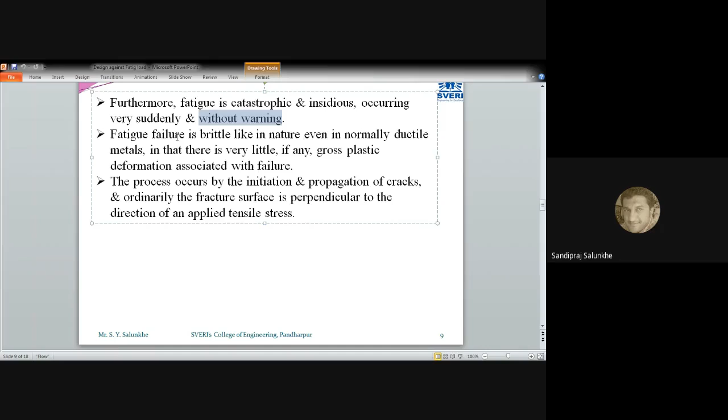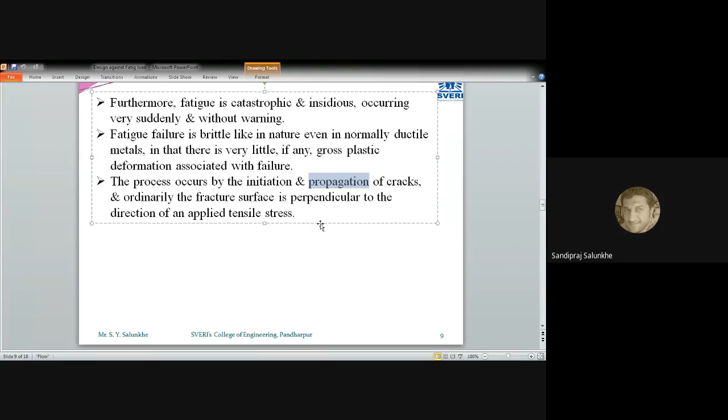So this is what about fatigue failure. And regarding the fatigue failure mechanism, in this last point, first the initiation of crack starts. Then afterwards, this crack propagates inside the material or component, and propagation starts. And when the propagation of crack is occurring, then ultimately the failure will occur for that component. We are going to see various examples of such failures. But the mechanism is: first crack initiation, crack generation in the component, then it propagates, and afterwards failure. So in 3 stages, this type of failure occurs.

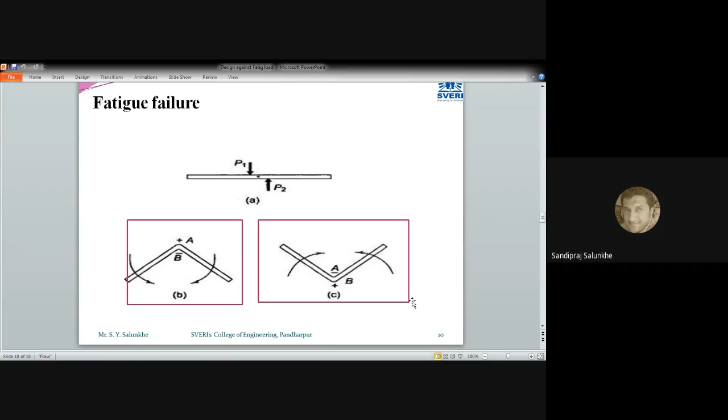Here is one more example. Fatigue failure is characterized by three stages: first, crack initiation, where a crack gets initiated because of the application of external force and the induced stress in that component. Then the crack propagates, and later on, finally failure occurs.

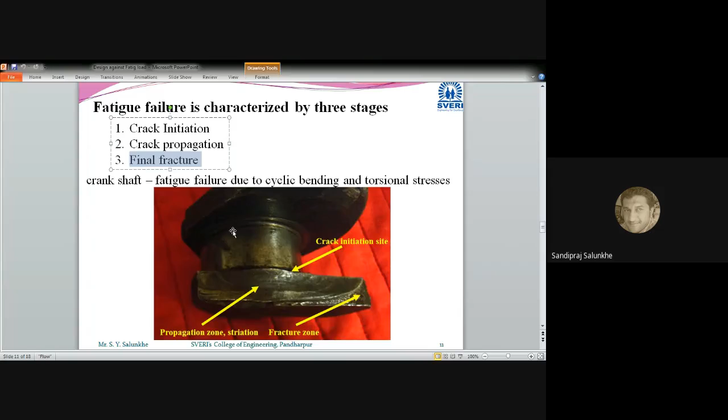Here you can see this picture of a crankshaft where the failure has occurred. The crankshaft is the main part used in a reciprocating type of engine. This crankshaft is connected to the bearing, and with the bearing we connect it to the connecting rod, which is connected to the piston. Now let me ask one question: whether the crankshaft undergoes repetitive type of stresses or gradual stress.

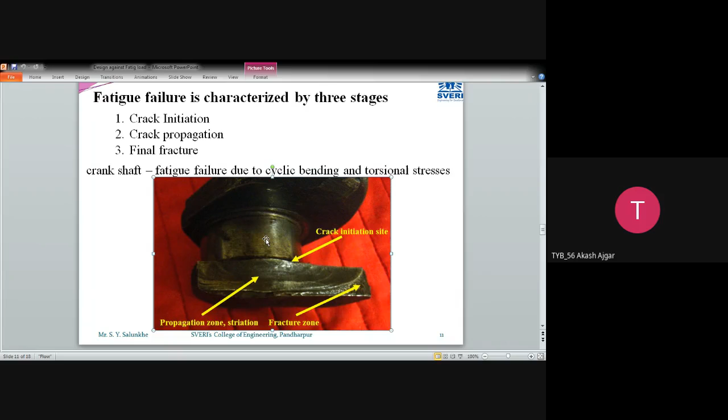I see, which component? Can you concentrate on a particular component? Piston. Piston. Okay, okay. So in case of piston also, repetitive type of stresses will get induced. You can mute yourself now.

Thank you. Yes, sir. Okay, very basic example I will take.

Consider the spade or shovel we use while digging for water, holding the gate of water - which type of stresses will be induced in that? Repetitive, okay, for a particular time period. Likewise, where cyclic stresses are induced, that means the stress will increase or decrease, become zero or become negative - that is compressive and tensile - that type of stress you are going to call fluctuating type of stress.

Okay, so many examples we have taken, and Akash has helped us have some examples of this repetitive type of stresses. So in case of connecting rod and crankshaft, this repetitive type of stress will get induced because basically the piston is going to compress the charge, then the charge is going to compress the piston. While we compress the piston or compress that charge with the piston, compressive stresses get induced.

And when we discharge it, okay, in that case also the fluctuating - that is the stress is going to increase and decrease. Maybe it becomes negative, or it remains on one side only as compressive, but the intensity of stress is going to change. Likewise, in case of this connecting rod, the stresses will get transferred to the crankshaft.

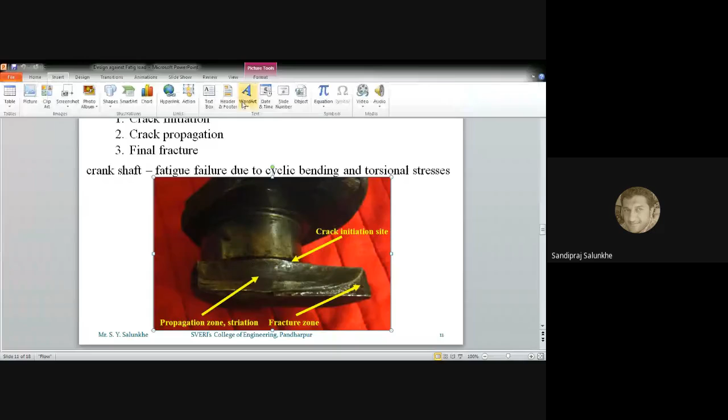point, and later on this crack gets propagated. Now this region, I'll say this is the region

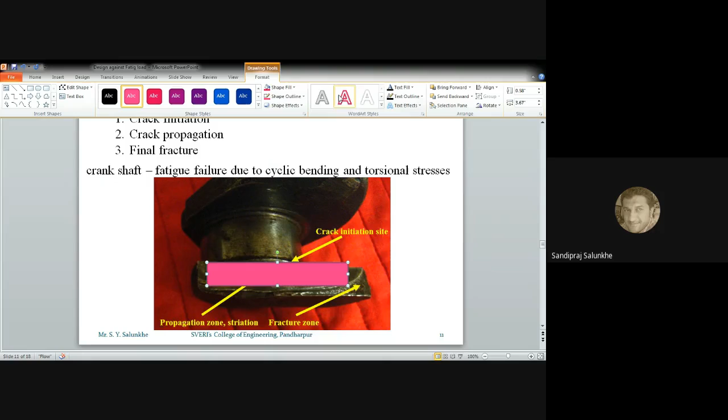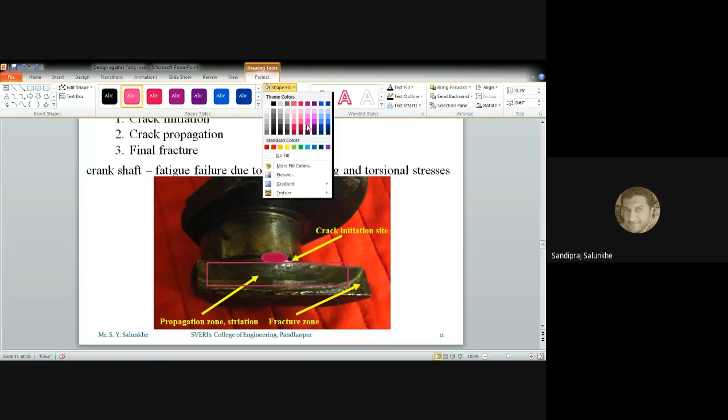where this crack gets propagated. And here it has started. This oval shape is the point where the crack has started, initiated. Later on it gets propagation. That is called the propagation zone. Okay, and sudden failure occurs in this region.

This propagation and sudden failure may take very little time, as this sudden thing happens suddenly. Okay, but this initiation and propagation may have some time delay, and what we have discussed about is

the condition monitoring and fault diagnosis. That technique gives us an idea that a crack has generated and it is about to propagate, so that we can take preventive measures and stop this failure. Okay, so that is part of this condition monitoring and fault diagnosis. But fatigue failure will have these three stages: initiation, propagation, and later on complete failure.

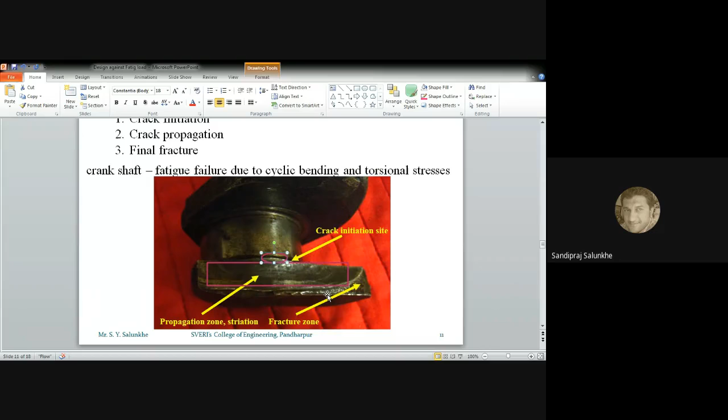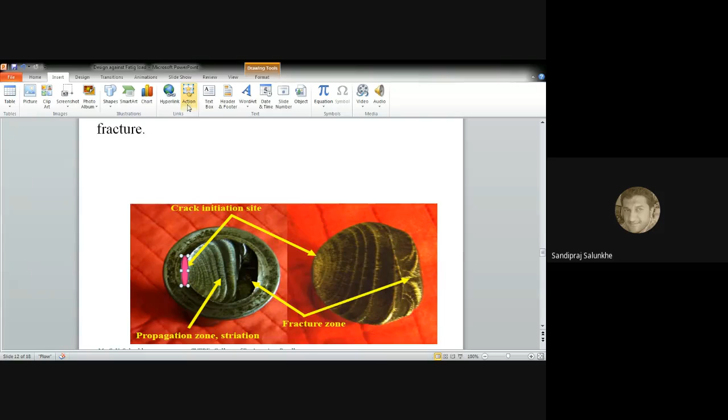Here you can say the initiation of that crack has started at this point. Okay, and later on this crack gets propagated to this region, up to this point.

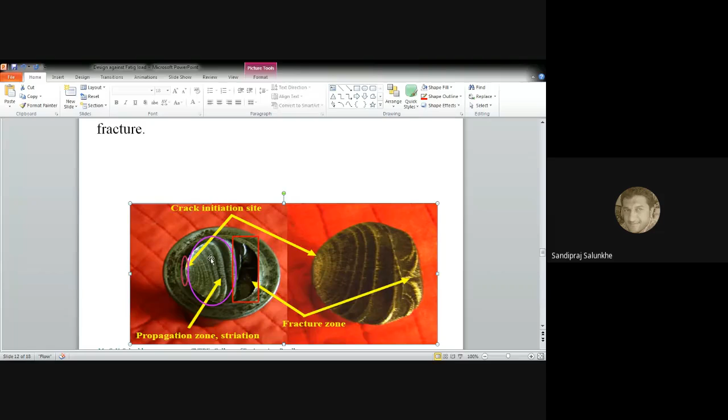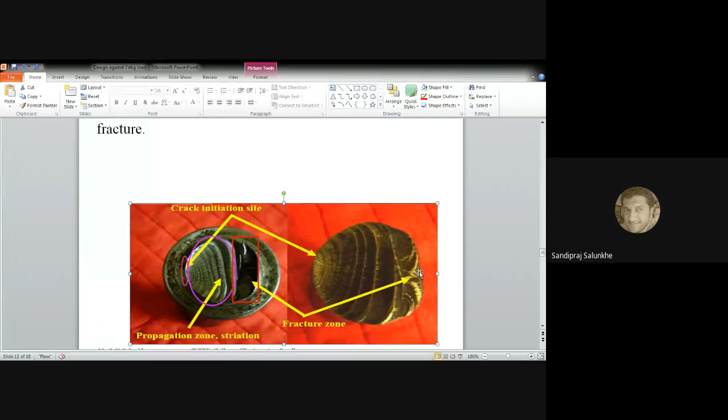I may not be able to cover the whole area with this shape, but this crack gets propagated, and this is what causes sudden failure. This part is failure occurring suddenly. Same way, this other component has failed and converted into two parts - this is one part and this is the second part. Here the crack has initiated, it gets propagated, and sudden failure occurs. So these are the three stages.

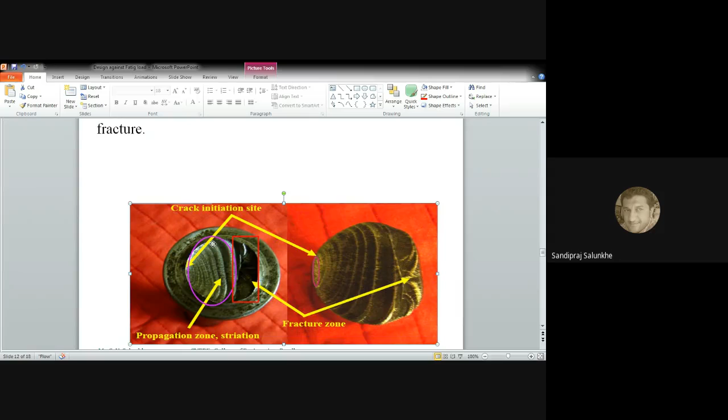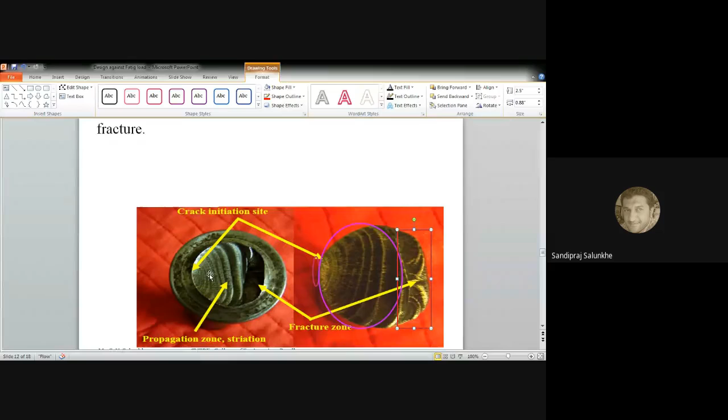Now out of that, if we are going to say, this is the crack initiation region, this is propagation up to this point, and this is sudden failure. So this is the mechanism of fatigue failure, where it occurs in these three stages.

Now let me ask one question - have you seen such type of failure?

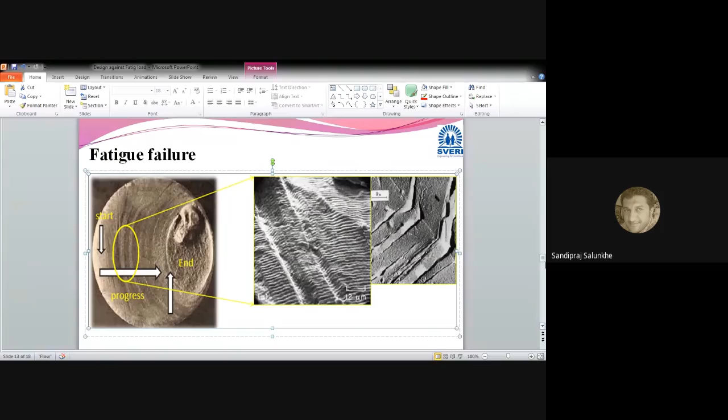Any question about the fatigue failure? There may be a long question in the exam to describe what is fatigue failure, what are the characteristics of that fatigue failure. More precisely, the examiner may ask to explain fatigue failure or explain the stages of fatigue failure.

In that case, it is good if you draw one diagram and mention the three stages of fatigue failure, and describe it. If you write the characteristics of fatigue failure, then all the characteristics we learned in the previous class as well as some characteristics learned in this class, you can describe point wise. And if you write your answer point wise, it will carry more weightage, you will get more marks.

Okay, any question? Have you understood each and every part of this lecture? Hello? Will you respond, please? Pratik Deshmukh. Pratik Deshmukh. Yes, sir, you understood? Hi yes sir. Okay, can we move further now?

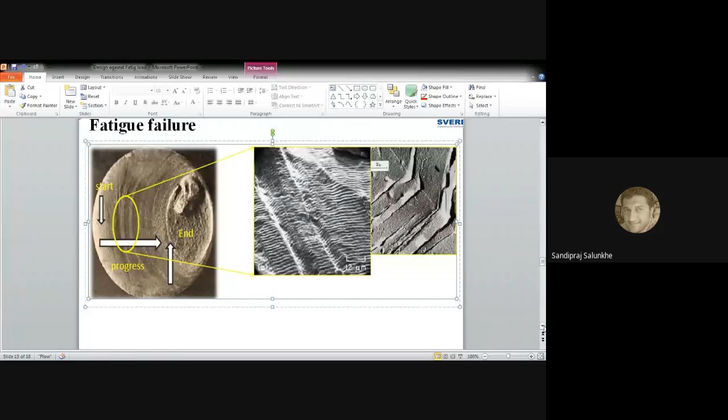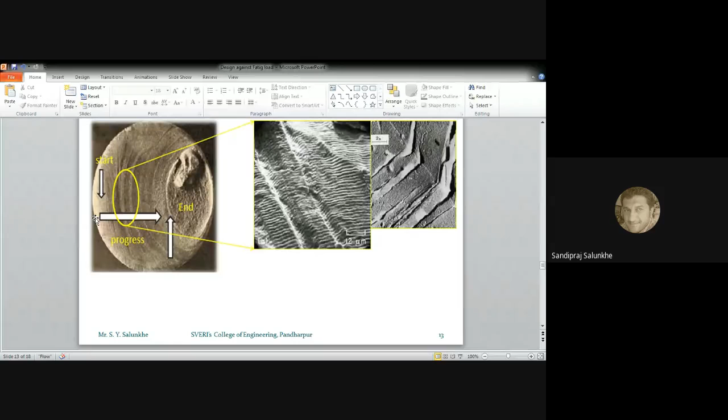So the next point we are going to see is what is the region where the crack gets initiated, or what is the possible region of a component where the crack gets initiated - that part is nothing but the part where stress gets concentrated, and the crack or failure may start at that point where more stresses are generated in any component.

Now, more stresses are generated - if you are going to explain it by mathematics, then stress is nothing but force divided by area. That is the simple mathematics of stress. Now, if you are going to see the physical significance of stress, it is nothing but the induced resistance inside that material, any material. Inside that material, it is a resistance to externally applied force.

What that externally applied force is trying to do is move those molecules away from each other, and the molecules of that component, if they are not willing to separate, they are going to have some attractive force, and that attractive force means they are going to stick with each other, then stress will get induced. That means they are resisting the externally applied force which is trying to separate them out. So that resistance is nothing but the stress.

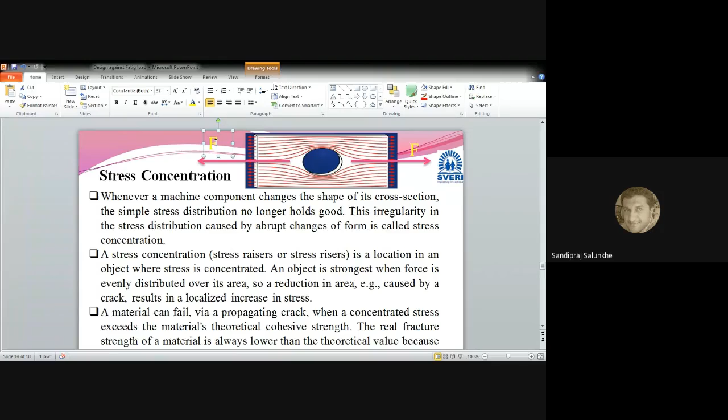How much will that stress be? The stress formula which we know is that force divided by area, divided by cross sectional area of that plate. That will be the stress sigma. Which type of stress will get induced? That will be tensile type stress.

This tensile type of stress will get induced in that component. So this is force divided by cross section area. Now my question is, if we are going to take this cross section area at this point,

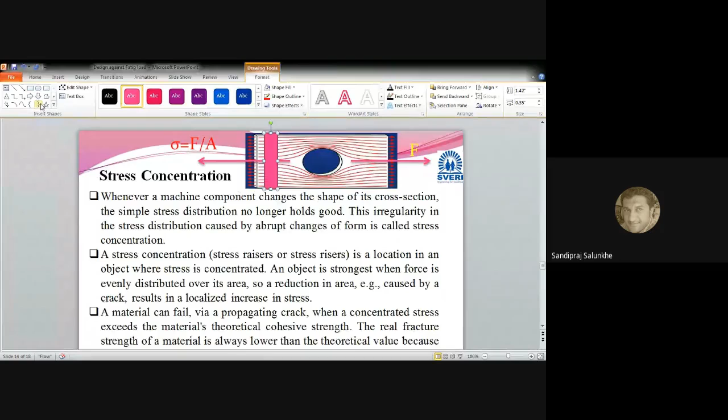and if we are going to take this cross sectional area at this other point, whether it will get different from each other, or can we consider the same area as A - suppose here it is 10 millimeter square. Can we take this as the same here as 10 millimeter square, or will it get reduced or increased?

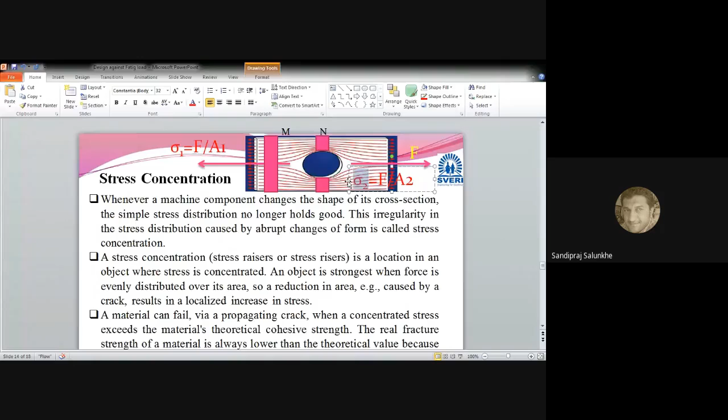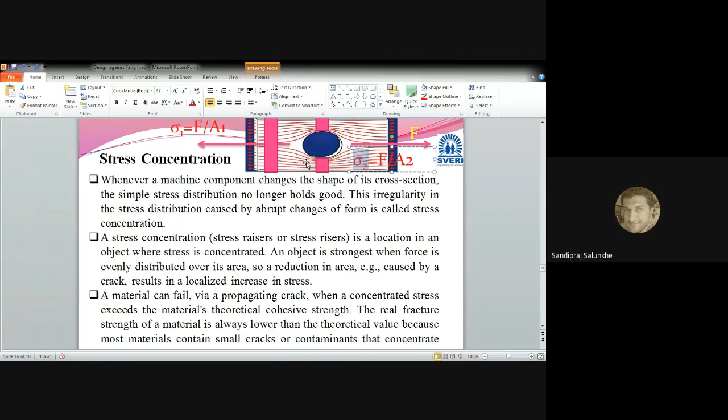And this stress concentration, we later on will read, this same thing has been explained here which I have explained right now, just it has written. So one more example as explained on this slide.

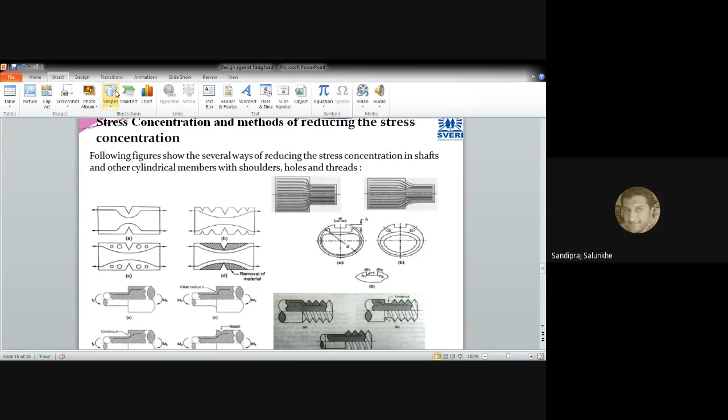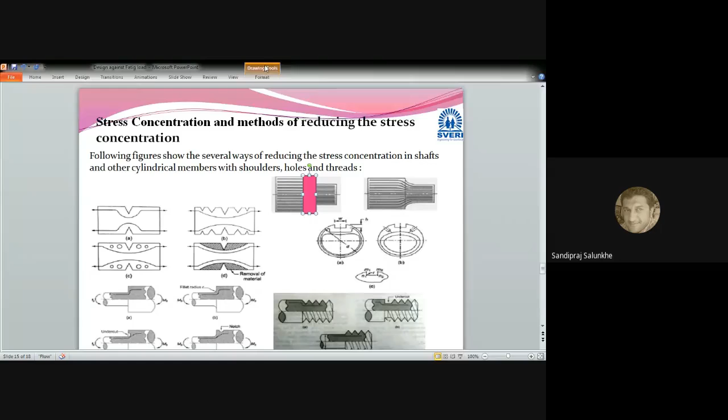In this slide also, if suppose we are going to have sudden change in cross section, then the stress will get concentrated at a particular region, and that particular region is nothing but the region where the sudden change has occurred at this point. At this point the concentration of stress occurs.

So what is the remedy for that? If we are going to have a sudden change, a step, instead of that if you make it a chamfer, then definitely that chamfer will allow the streamlines smoothly to flow to the next region, which is less than the previous area.

Such type of things may happen in case of notches which you are going to provide on some parts. These notches, basically in case of threaded parts, may be generated, or some components have notches generated as a geometrical requirement of that component.

So if you want to reduce that stress concentration, then instead of having one notch, you can have other notches that follow the main notch, so that the streamline will become more fluent.

Or here one more remedy has been explained, that we can drill holes beside the notch, so that the stress concentration will get reduced. We can remove that shaded area, and we can again make these streamlines flow smoothly.

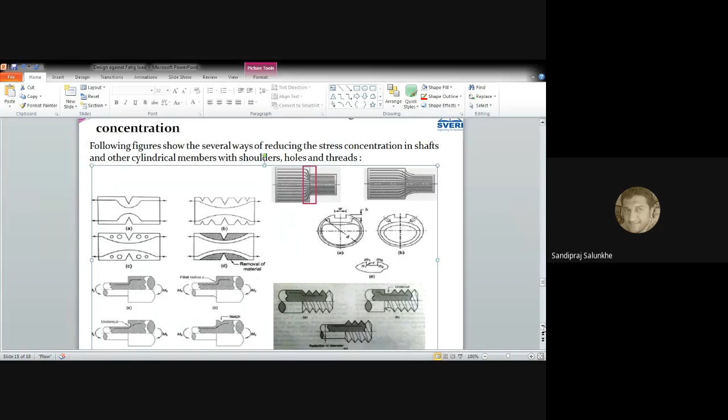Same thing which I have explained here has been explained here also, that is we are going to make the chamfer. Or another remedy is that we can make some groove here, so that the streamlines become smooth. The only thing we have to do is that the streamlines should not get gathered or concentrated at a certain point. They should have smooth flow, and that is called the remedy to stress concentration.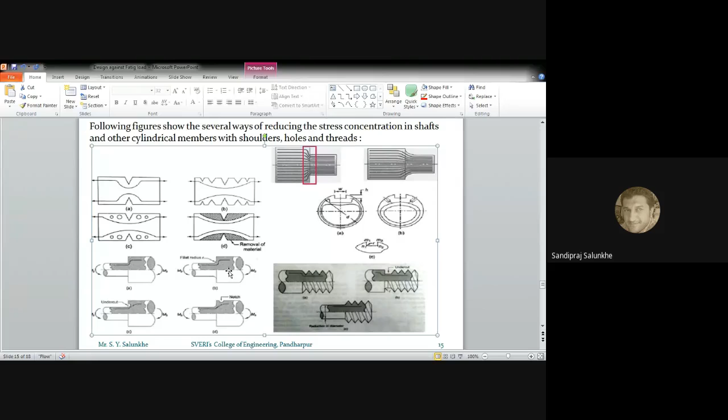Hope you understood all these things. Do you have any question? Hello? Should I explain it once again? Yes, sir. Okay.

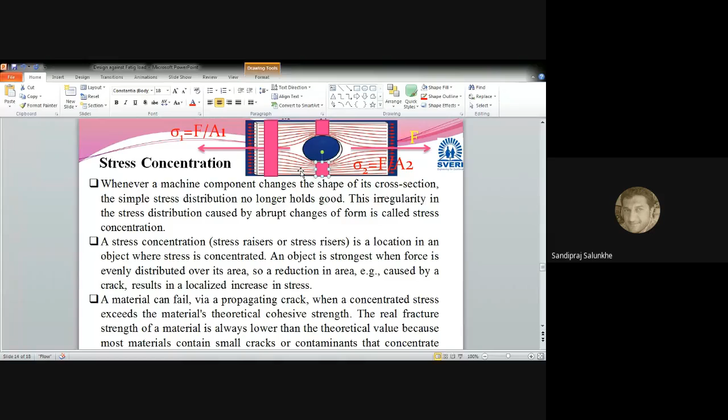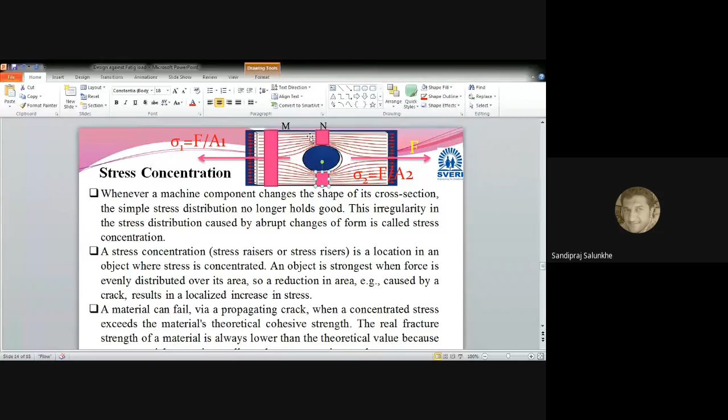आता हे जे झालेले स्ट्रेस कॉन्सन्ट्रेशन आहे, ते कसं रिड्यूस करायचं, कारण ज्या ठिकाणी स्ट्रेस कॉन्सन्ट्रेट होतो त्या ठिकाणी फेल्युअरचे चान्सेस जास्त आहेत. आपण मागे म्हटलं की रिपिटेटिव्ह टाइप ऑफ स्ट्रेसेस जनरेट व्हायला लागले तर फेल्युअर ऑकर्स वेअर द सडन चेंज इन क्रॉस सेक्शन ऑर वेअर द स्ट्रेस गेट कॉन्सन्ट्रेट. त्या ठिकाणी क्रॅक जनरेशनची शक्यता सगळ्यात जास्त आहे. मग ते क्रॅक जनरेशन होऊ नये त्याच्यासाठी स्ट्रेसचं कॉन्सन्ट्रेशन कमी केलं पाहिजे.

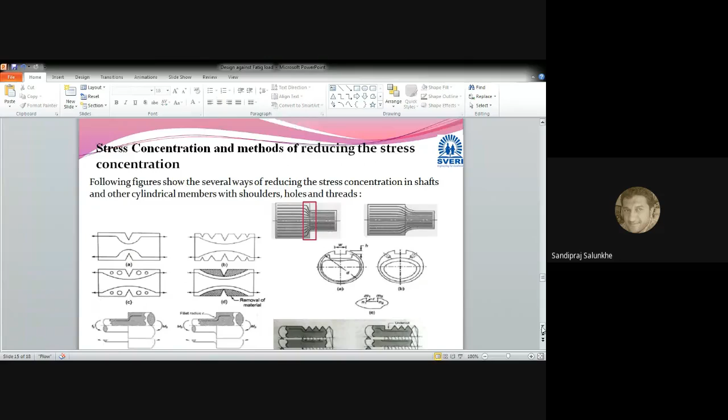तो स्ट्रेस कॉन्सन्ट्रेशन कमी करण्यासाठी, आता ह्या ज्या पॉसिबल वेज आहेत किंवा पॉसिबल ठिकाण आहेत जिथे स्ट्रेस कॉन्सन्ट्रेशन होतो ते कुठले कुठले आहेत. एक आहे सडन चेंज इन क्रॉस सेक्शन. म्हणजे या ठिकाणी आपण जर स्टेप तयार केली एखाद्या कंपोनंटवर तर तो सडन चेंज इन क्रॉस सेक्शन आहे. म्हणजे इथला एरिया वेगळा आहे, इथला एरिया वेगळा आहे. डेफिनेटली सेम फोर्स जर अप्लाय केला तर इथला स्ट्रेस वेगळा येईल, कारण एरिया दोन वेगवेगळे आहेत. पण या रिजनला काय होईल की हा स्ट्रेस कॉन्सन्ट्रेट होईल.

ते स्ट्रेस कॉन्सन्ट्रेशन कमी करण्यासाठी त्याला जर आपण फिलेट रेडियस केला किंवा चॅम्पर केलं तर तो कॉन्सन्ट्रेशन कमी होईल. म्हणजे स्ट्रेसच्या ज्या स्ट्रीमलाईन आहेत त्या स्मूथ फ्लो होतील. म्हणजे हे समजा टेन्साइल स्ट्रेस आहे तो असा स्मूथ मोठ्या एरियाकडून छोट्या एरियाकडे ट्रान्सफर केला जाईल. म्हणजे छोटा एरिया केपेबल असेल स्ट्रेस घ्यायला तर डेफिनेटली तो विदस्टँड होईल, तो जर केपेबल नसेल तर तुटून जाईल.

तसंच नॉच - काही पार्ट मध्ये आपल्याला नॉच तयार करायला लागतात. त्या नॉच मध्ये काय होतं, मग ह्या सगळ्या स्ट्रीमलाईन जर इथं ड्रॉ करायच्या म्हटलं तर ह्या एरियामध्ये त्या स्ट्रीमलाईन सगळ्या कॉन्सन्ट्रेट होतील, एवढ्या एरियामध्ये, अर्थात त्या नॉचचा एरिया वगळून. त्या एरियामध्ये त्या सगळ्या कॉन्सन्ट्रेट होतील. बरोबर आहे, इथे डेफिनेटली स्ट्रेस कॉन्सन्ट्रेशन वाढणार आहे.

हे स्ट्रेस कॉन्सन्ट्रेशन कमी करायला काय करायचं की छोट्या छोट्या नॉच पाडायच्या त्याच्या साईडला. जे मेन नॉच आपल्याला रिक्वायर्ड आहे त्या साईडला छोट्या नॉट रिक्वायर्ड नॉच पाडायच्या. त्याच्यामुळे काय होईल की तो ग्रॅज्युअली एरिया कमी कमी कमी होत जाईल आणि ते स्ट्रेसचे कॉन्सन्ट्रेशन डेफिनेटली इथं होणारच आहे. पण इथं होत असताना ह्या सडन चेंज एरियामुळं सगळ्या स्ट्रीमलाईन्स इथं रश होतील. त्या स्ट्रीमलाईन्स रश न होता त्या इथूनच स्टार्ट होतील कमी कमी कमी व्हायला आणि इथनं परत स्मूथ बाहेर पडतील. जस्ट लाईक वॉटर फ्लो आपण त्याचं सिम्युलेशन करतोय.

तसं काही ठिकाणी कीवेज असतात. ते कीवेज जर इथं पाडले तर जनरेट होणारा जो स्ट्रेस आहे, आपण सर्क्युलर स्ट्रीमलाईन्स काढले तर त्या सर्क्युलर स्ट्रीमलाईन काय होतील की इथं कॉन्सन्ट्रेट होतील ह्या रिजनमध्ये. मग त्या कॉन्सन्ट्रेट न होण्यासाठी आपण जर त्या साईडनं दोन होल पाडले, त्या कीवेजच्या साईडनं होल पाडले, तर इथूनच त्या स्ट्रीमलाईन्स कमी व्हायला सुरुवात होतील. म्हणजे त्या स्ट्रीमलाईनचा स्मूथ फ्लो स्टार्ट होईल. नो डाऊट तो एरिया आपण वीक करतोय.

त्याच्यासाठी आपण दुसरा पर्याय वापरू की काही ठिकाणी त्या एरियाला सबस्टिट्यूटरी एरिया देऊ, तो एरिया वाढवू. म्हणजे ह्या डायमीटर जर 3 mm येत असेल तर तो आपण 6 mm करू. पण स्ट्रेस कॉन्सन्ट्रेशन कमी होईल इथलं. इफ वी आर गोइंग टू गेट द डायमेन्शन ऑफ दिस शाफ्ट ॲज अ 3 mm diameter, we'll keep it as a 6 mm diameter, no doubt. Okay, where we have kept or we have increased the factor of safety. कॅल्क्युलेशनमध्ये 3 येत असेल तर आपण 6 घेऊ.

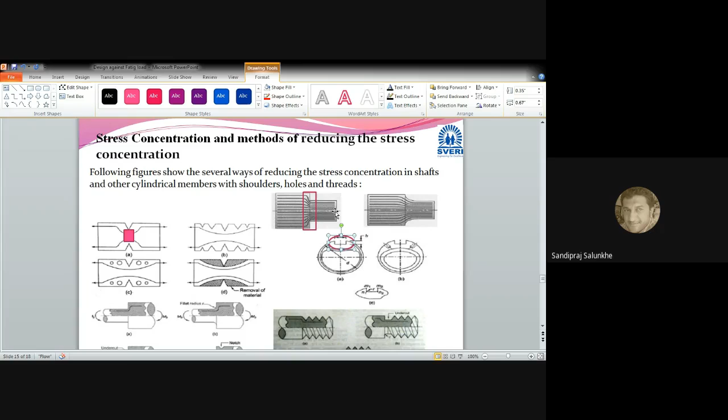आणि त्या ठिकाणी होल ड्रिल करू तर ते स्ट्रेसचं जे कॉन्सन्ट्रेशन आहे ते तिथं कमी होईल. आणि दॅट इज कॉल्ड एज रेमिडियल मेजर्स फॉर द स्ट्रेस कॉन्सन्ट्रेशन.

Any question? समजले?

Yes sir. Okay, there will be, or there may be - not I will say will be, there may be a question in exam also: explain what is stress concentration and what are the remedies on stress concentration.